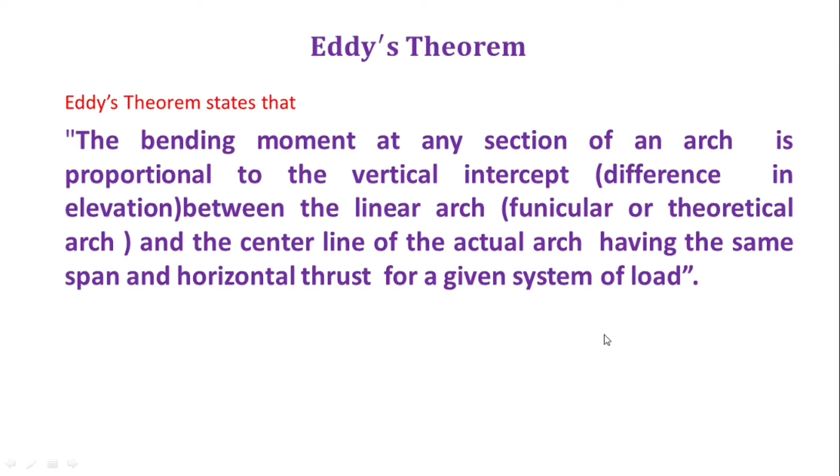So here this bending moment is proportional to y1 minus y. Here y1 is the vertical intercept of the linear arch and y is the vertical intercept of the actual arch. It is like this. Suppose this is the linear arch, and here this is the actual arch.

So this vertical intercept at any distance x. Suppose here. This total is called y1, and this height is called y. So the bending moment is proportional to the vertical intercept between the linear arch and the actual arch. So this is the linear arch and this is the actual arch.

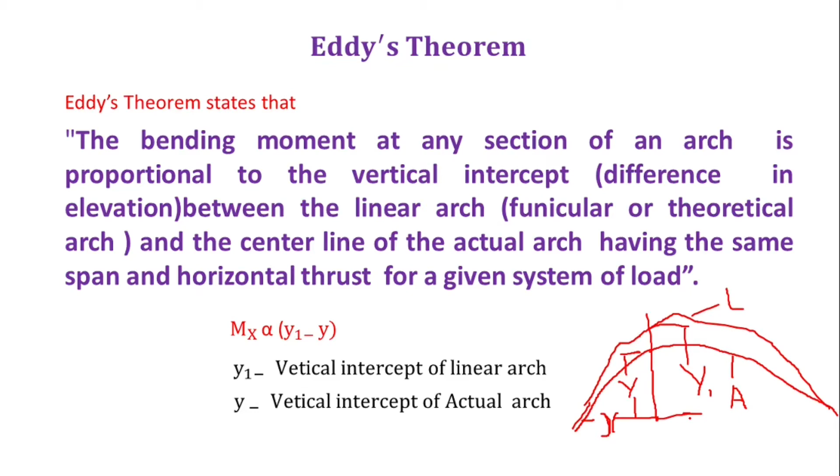Now suppose this is the actual arch, subjected to a number of loads. The arch which follows a parabolic, circular or elliptical shape, is easily constructed and has an aesthetic appearance is called the actual arch.

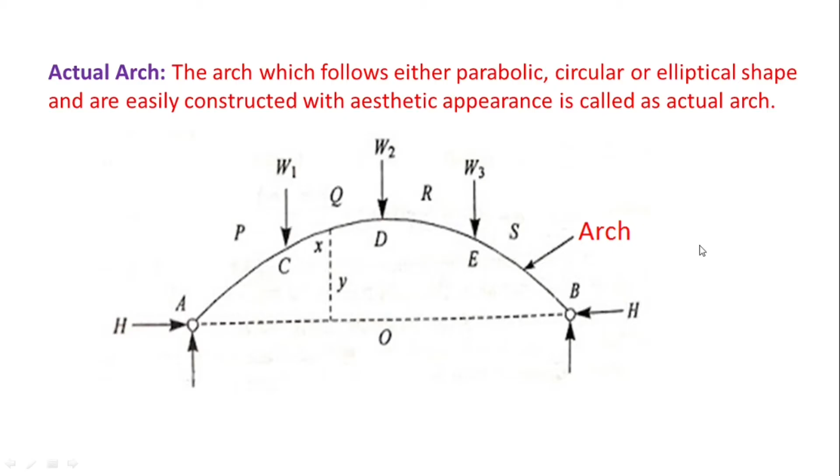Now the linear arch: the arch which follows a funicular polygon shape after application of a series of loads is called a linear or theoretical arch. This is the linear arch which is formed due to the application of loads. These lines are connected to each other.

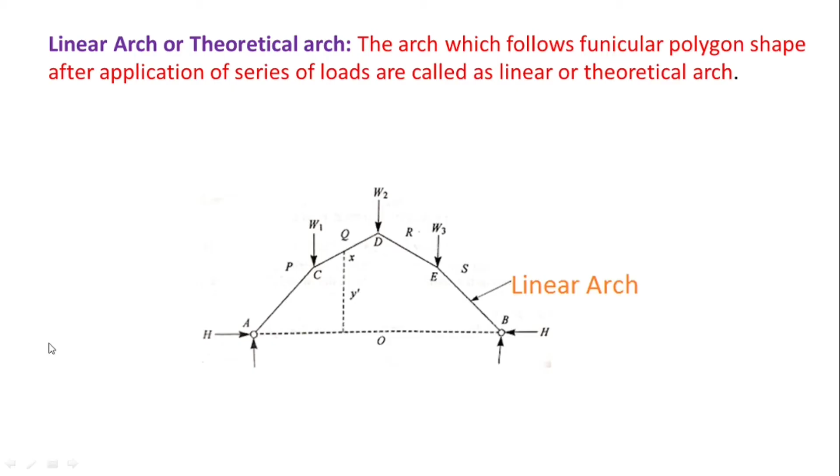Now suppose this is the arch, with a hinge here and a hinge here. Suppose we apply the load W here. When you apply the load W, the segment from this support is joined to it, and this is joined to the next support. Now suppose this is W1; if you apply W2 here, this will join W1 to W2, and then this joins to the support.

So in this way a series of connected lines is formed due to the application of the load. That arch is called a theoretical arch or a linear arch. A linear arch is subjected to axial thrust only, and there is no bending moment and shear force anywhere. So this type of arch is called the linear arch.

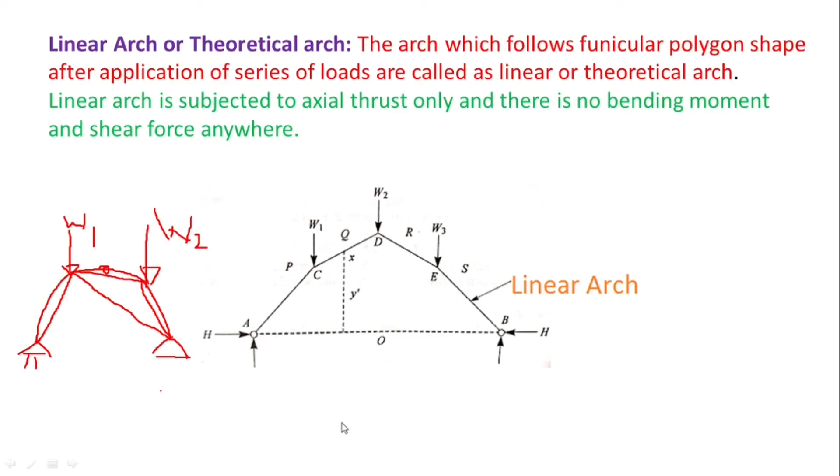Here a funicular polygon shape is formed after the application of the series of loads. When you apply W1, A joins to W1. When you apply W2, W1 to W2, then W3, then W3 to point B. In this way the funicular shape is formed. That type of arch is called the linear or theoretical arch.

So above, A to W1, W2, W3 and B, this is the linear arch, and below, the parabolic shape is the actual arch. The vertical intercept of the linear arch is y1, and the vertical intercept of the actual arch at a distance x is y. So these are the two intercepts: the first for the linear arch and the second for the actual arch.

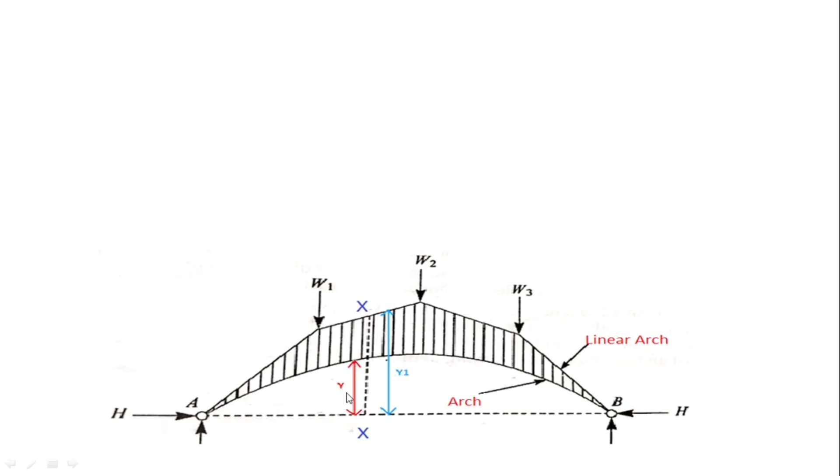The bending moment at section x in the linear arch is equal to H, the thrust, into y1. That is called the beam moment. And the bending moment at section xx in the actual arch is H, the thrust, into y. That is called the thrust moment.

So the net bending moment at this section is equal to H into y1, the beam moment, minus H into y, the thrust moment. So the net bending moment in the arch at any section is equal to the beam moment minus the thrust moment. Taking H common, the net bending moment at section xx is H into y1 minus y.

So as per Eddy's theorem, the bending moment at any distance x is proportional to the vertical intercept between the linear arch and the actual arch.

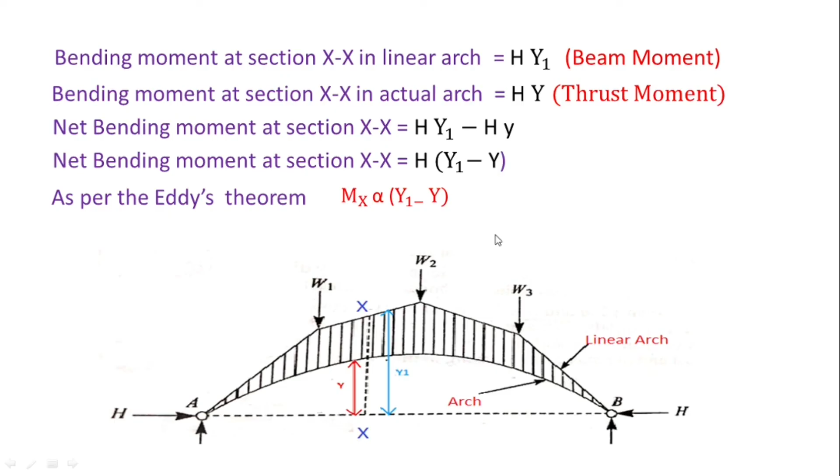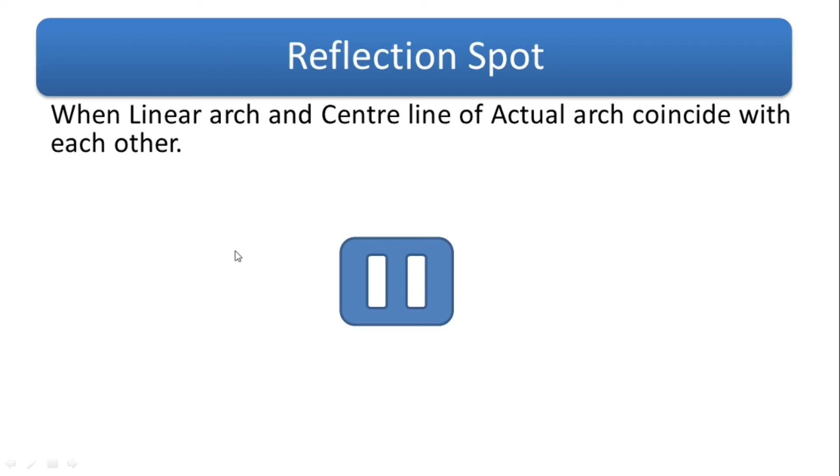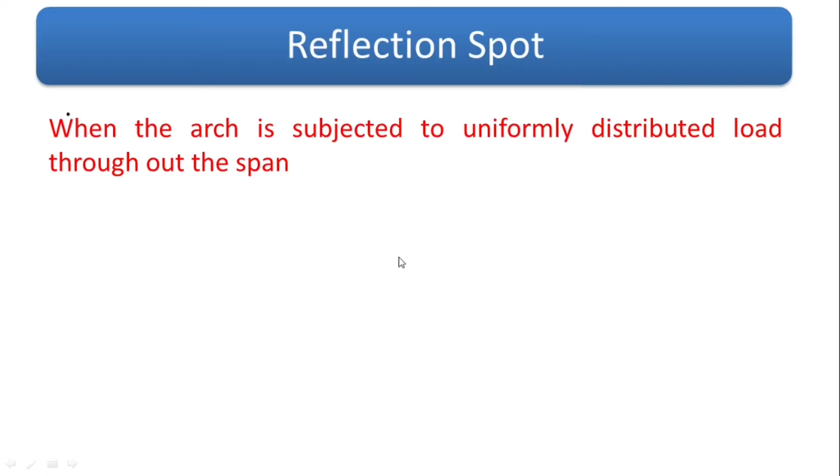Now take a pause, and a question arises in the mind: when do the linear arch and the center line of the actual arch coincide with each other? When the arch is subjected to a uniformly distributed load throughout the span, the linear arch coincides with the center line of the actual arch.